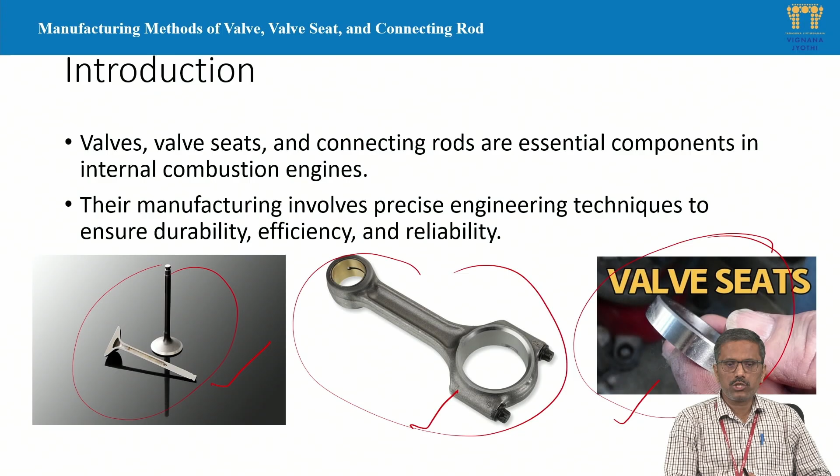Last session we discussed some components of engine manufacturing methods, and we continue that topic. Today we are going to discuss some more components of automobile engine manufacturing methods. Title of today's class is Manufacturing Methods of Valve, Valve Seat and Connecting Rod. So you can see here, this is valves, this is connecting rod, and this is valve seat. Today we are going to discuss how we manufacture these components using conventional manufacturing methods. Valve seats and connecting rods are essential components in internal combustion engines, that is IC engines, and their manufacturing involves very precise engineering techniques to ensure durability, efficiency, and reliability.

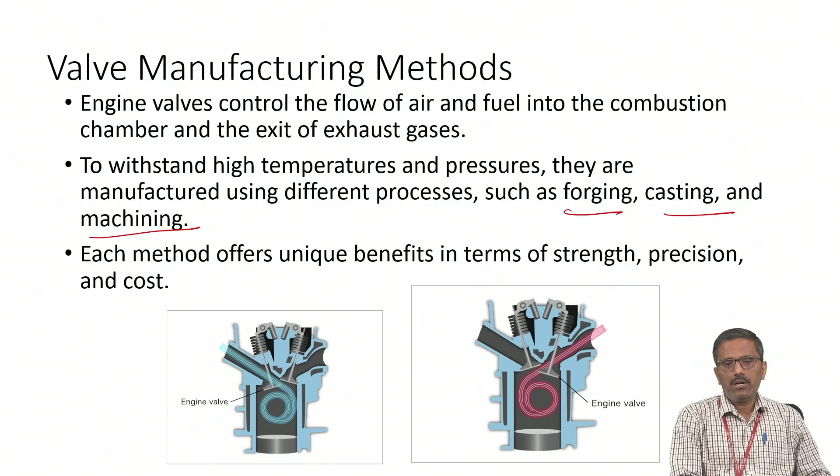Let us start with valve manufacturing methods. These valves we use in engine to control the flow of air, that is inlet and fuel, into the combustion chamber, and exit of exhaust gases through exhaust valve, to withstand high temperatures and pressures. They are manufactured using different methods such as forging, casting, and machining. Each method offers unique benefits in terms of strength, precision, and cost.

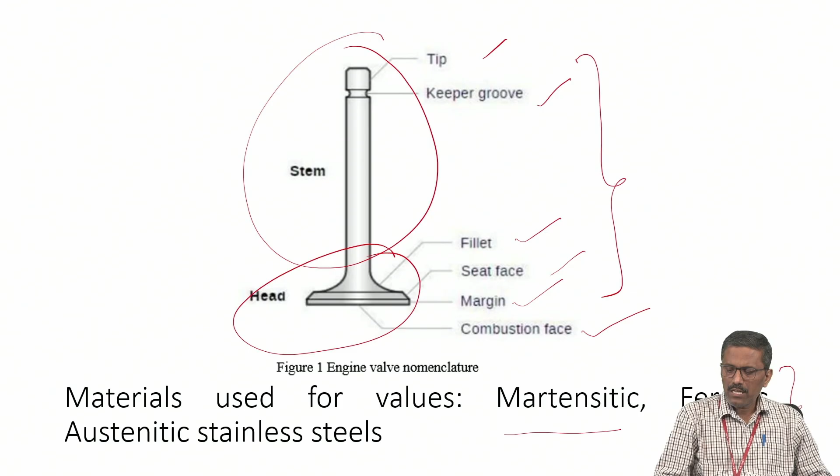This is the structure of engine valve. It consists of basically two parts: one is head, another one is stem. There are minor elements of this engine valve: tip, keeper groove, fillet, seat face, margin, combustion face. The materials mostly we use to manufacture engine valves are Martensitic stainless steel, ferritic stainless steel, and austenitic stainless steel.

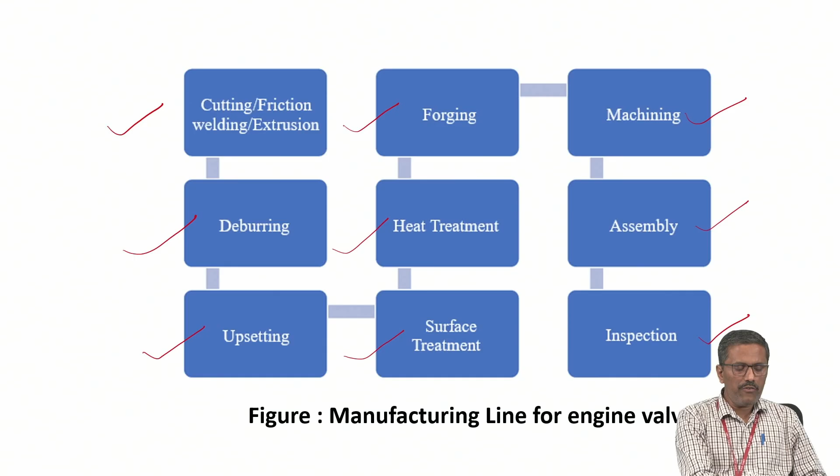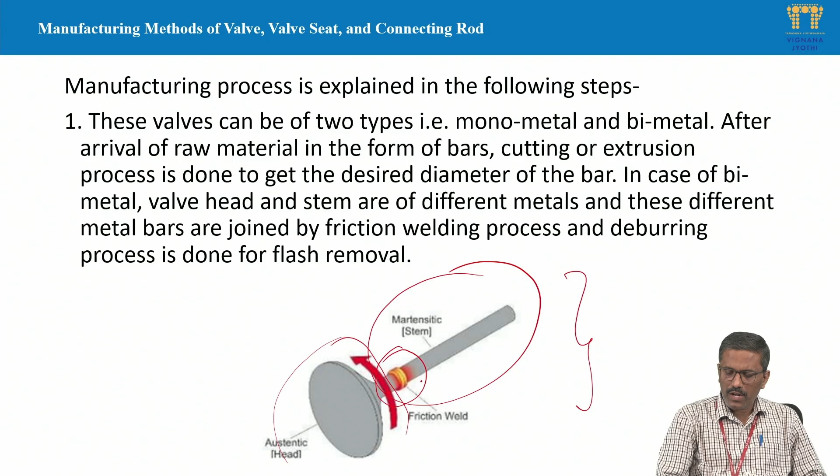As we discussed earlier, there are different methods, and here is one of them, called friction welding. Here there are two components of the engine valve: one is the stem, another is the head. These two are combined or joined together using friction welding. This is one of the methods of manufacturing the engine valve. Here you can see the joint that is welded using friction welding.

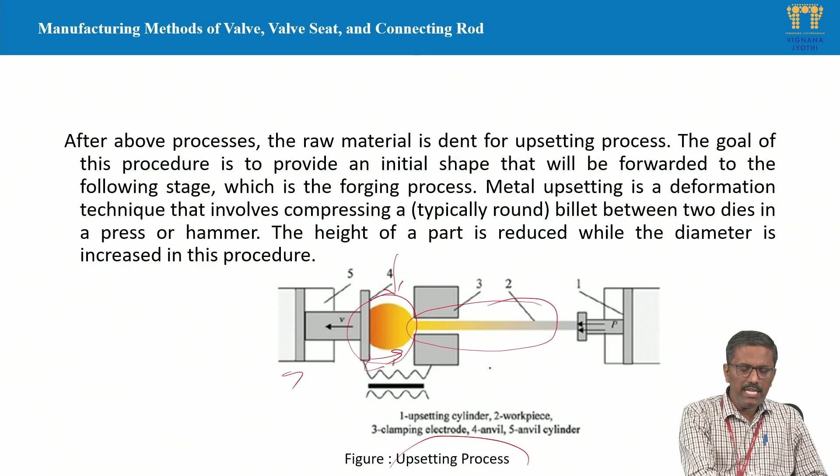Another method is the upsetting process, which comes under forging. In the forging or upsetting process, the valve head is forged using the upsetting process. In upsetting, the diameter is increased and the length is decreased, whereas the stem dimensions are not changed; only the head portion dimensions are changed using the upsetting process. After upsetting, we use CNC turning to get the groove at the appropriate position.

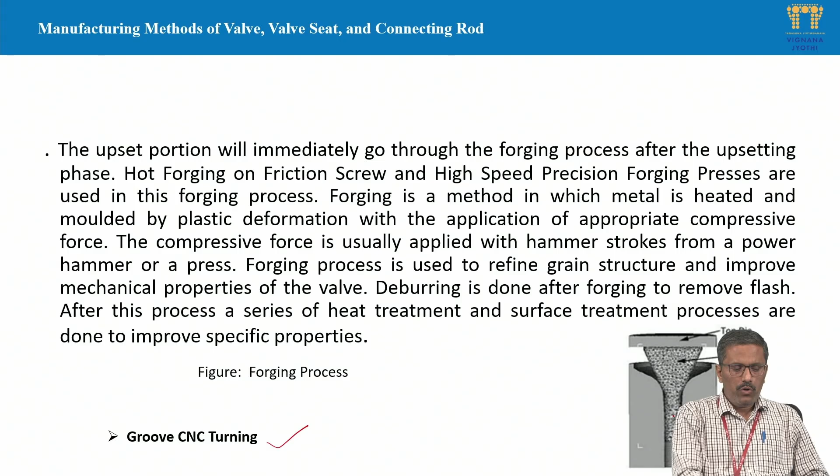In shot blasting, a surface treatment technique, high velocity steel abrasives are hit onto the surface of the valve so that it cleans the surface as well as undergoes treatment. This is also called a secondary finishing process, which produces good results in terms of surface strength.

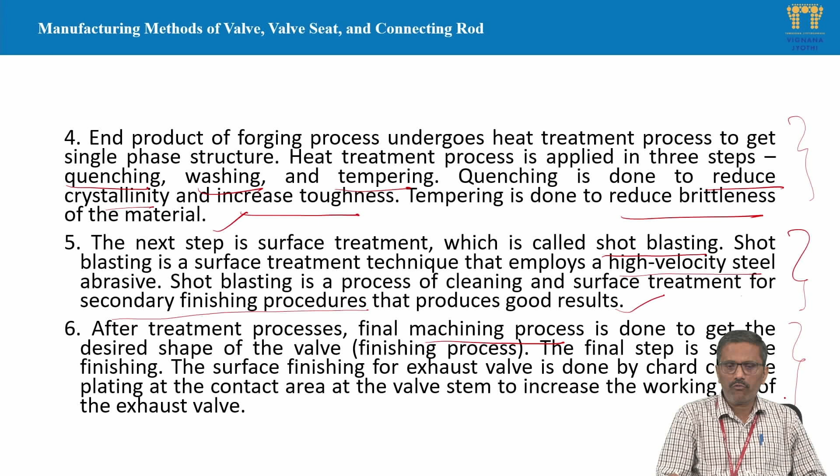After these two processes, we go for the final machining process to get exact and required dimensions using machining, mostly turning process. So that's what you can see here: different stages of manufacturing the valve using the forging process.

Initially we take a cylindrical rod, and then using upsetting, that is a forging process, we manufacture the head portion of the valve.

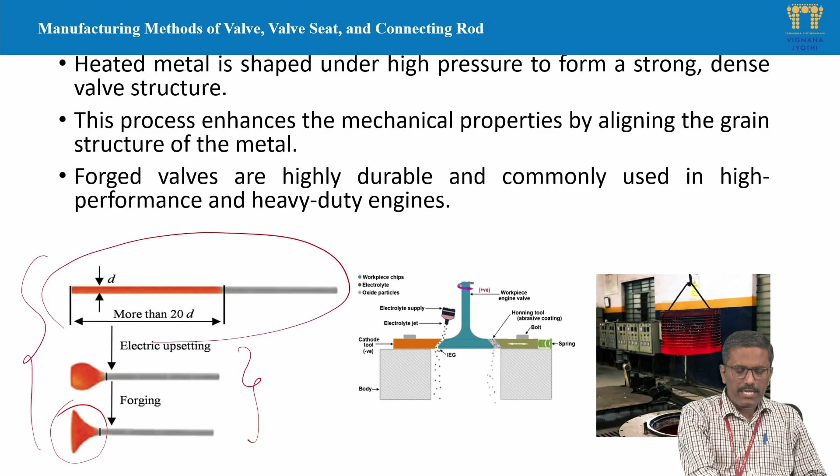Then we go for machining and finishing so that we get exact dimensions. Precision machining is performed to achieve the exact dimensions and smoothness of the surface, which includes grinding, lapping, and polishing to enhance wear resistance.

After that, to improve further properties and the lifespan of the valve, we go for chrome and nitride coating to reduce friction as well as increase the lifespan of the valve.

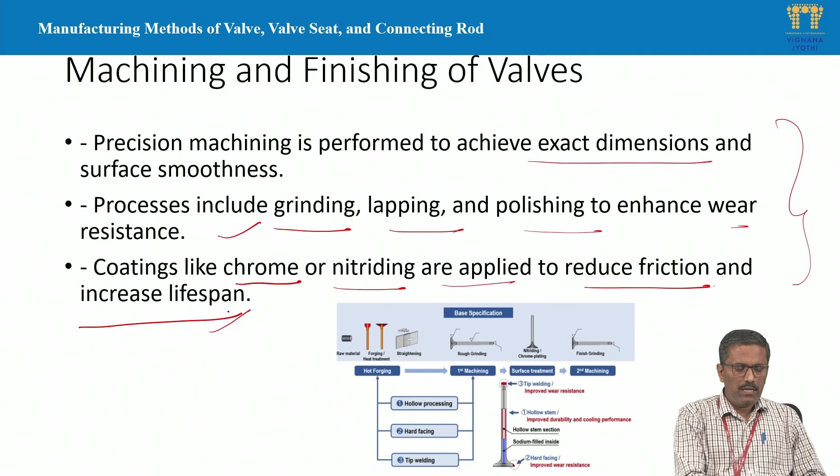Not only surface treatments, we also go for induction hardening to improve the hardness.

There are two methods of surface treatment mostly we use. One is the hard chrome method, where chromium is deposited on the surface, with thickness from 2 to 250 microns. That is the first method to improve surface hardness.

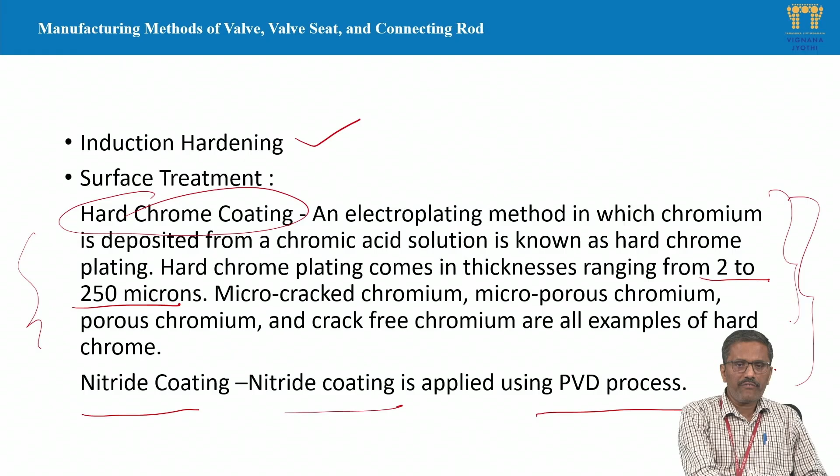We can also go for nitride coating, where we use nitride coating with physical vapor deposition. These two methods we use for improving the surface characteristics or properties of the engine valve using surface heat treatment.

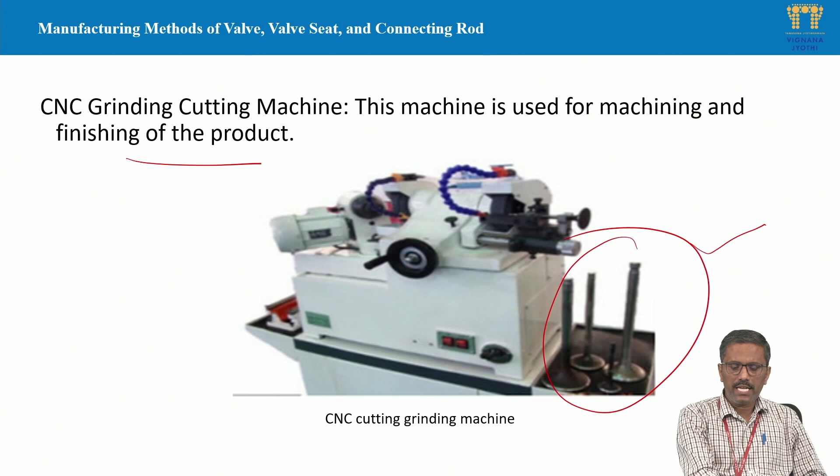This is a CNC grinding machine used to improve the dimensional accuracy of the valve. So that's what you can see here: these are the valves after manufacturing using the CNC surface grinding process.

The next component is the valve seat. So this is a valve seat, and here also you can see a valve seat. The valve seat ensures a tight seal between the valve and the cylinder head so that unnecessary leakage of gases may be avoided, whether through the inlet valve or exhaust valve.

To avoid that, a seat is required, and that seat is inserted into the engine valve entry place. The common methods for manufacturing the valve seat are powder metallurgy, which we discussed in the last session, casting, and CNC machining.

In the powder metallurgy process, we take the powder and blend it by adding a binder. Then we go for the compacting process to get the required shape, and then sintering, so that we get the required shape and size. These are the sequence in powder metallurgy.

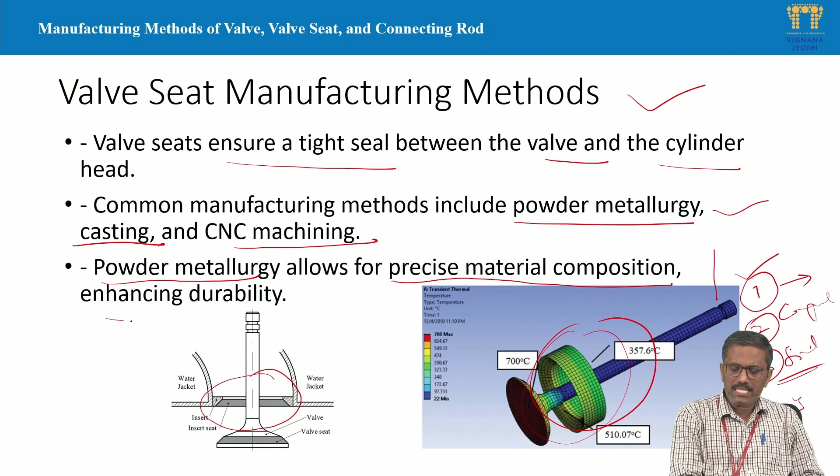The first step is powder mixing, that is blending, then we go for the compacting process, and then the sintering process, so that we get the required shape, size, and dimensional accuracy. This produces a precise material composition and enhances the durability of the valve seat.

The next mostly used method is investment casting. Here productivity is also improved, and in investment casting we get good surface finish.

To get good surface finish, we use grinding, boring, and turning processes. Turning is for external surface finishing, boring is for internal surface machining, and grinding is for overall surface improvement. After that, we go for surface treatment.

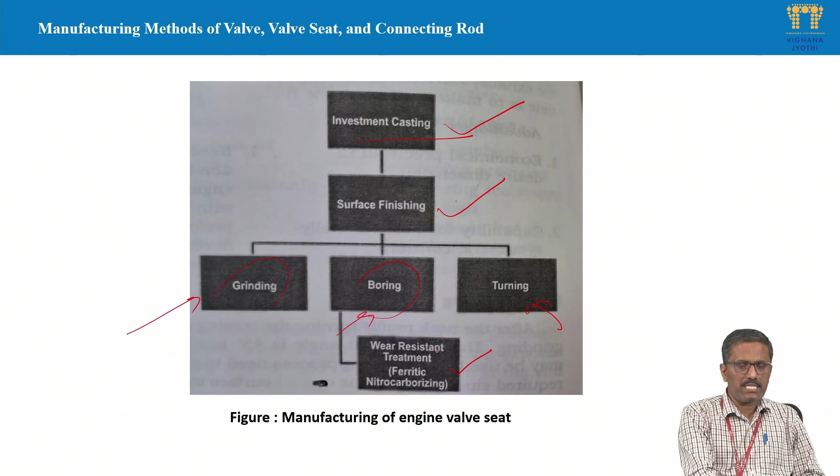Mostly we use the ferritic nitrocarburizing process, which increases wear resistance. The next method, after the mostly used powder metallurgy process, is the investment casting process.

This is a general casting process. In investment casting, first we make wax patterns using wax material, and these wax patterns are attached to a central sprue with a gating system. Then the pattern clusters are dipped into ceramic slurry several times until we gain the required shell thickness.

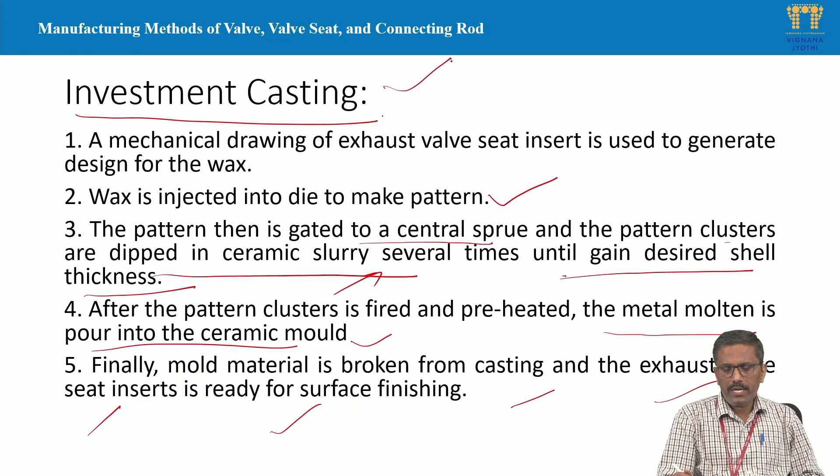After that, the pattern cluster is fired so that the molten metal is poured into the ceramic mold after the wax is evaporated. Finally, the mold is broken from the casting so that the exhaust valve seat can be obtained. After obtaining the valve seat from the investment casting process, we go for surface finishing methods.

Valve seats are the surfaces against which each engine valve closes, ensuring proper sealing in the combustion chamber. The primary function is to facilitate efficient heat dissipation and maintain compression within the engine. That's the purpose we use valve seats for.

The materials used for valve seats are cast iron, alloy steel, copper and beryllium, and powder metal inserts. So these are the different manufacturing methods for valve seat.

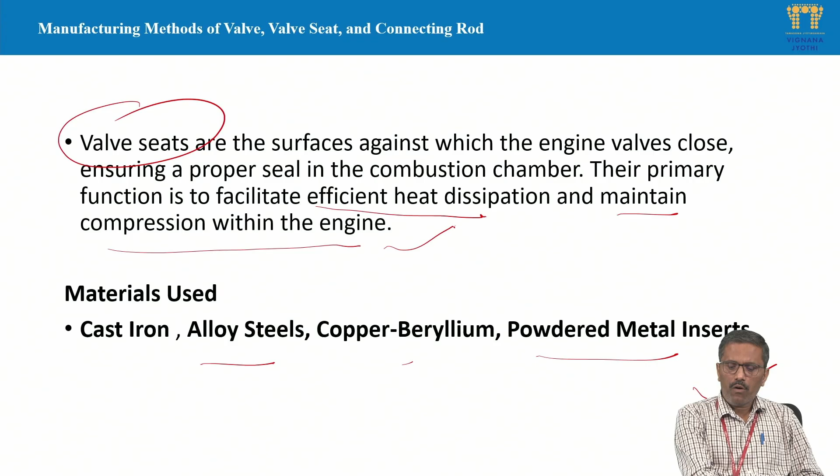The last component for today's session is the connecting rod. This is a connecting rod - a very important component that links the piston to the crankshaft. It must withstand the extreme forces which are developed from the forces obtained on the piston.

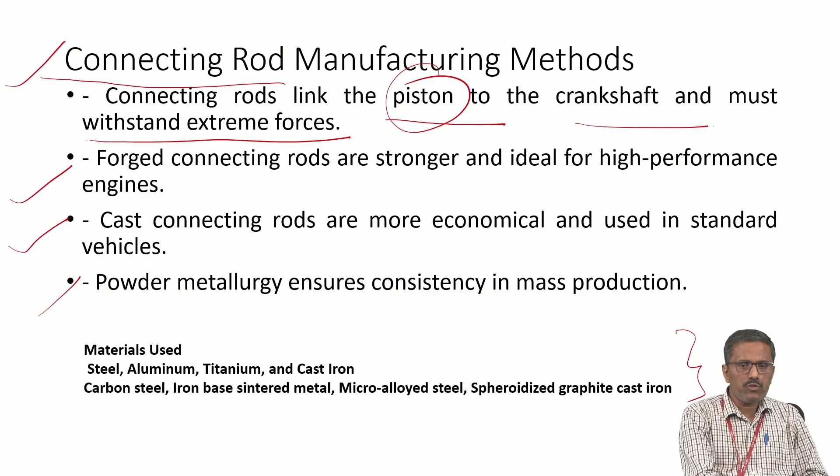Connecting rods are mostly manufactured with a forging process, and sometimes we also use casting process, and very rarely powder metallurgy process. The materials used for manufacturing connecting rods are steel, aluminum, titanium, cast iron. Sometimes we also use carbon steel, iron based sintered material, microalloy steels, and spheroidal graphite cast iron. These are the materials used for manufacturing connecting rods.

One method to manufacture the connecting rod is the casting process. Here you can see this is a die - mostly we use the die casting process. In a die cavity the shape of the casting connecting rod is prepared, and then we pour the molten metal into the die, and after solidification we take it out, finally getting the connecting rod using die casting process.

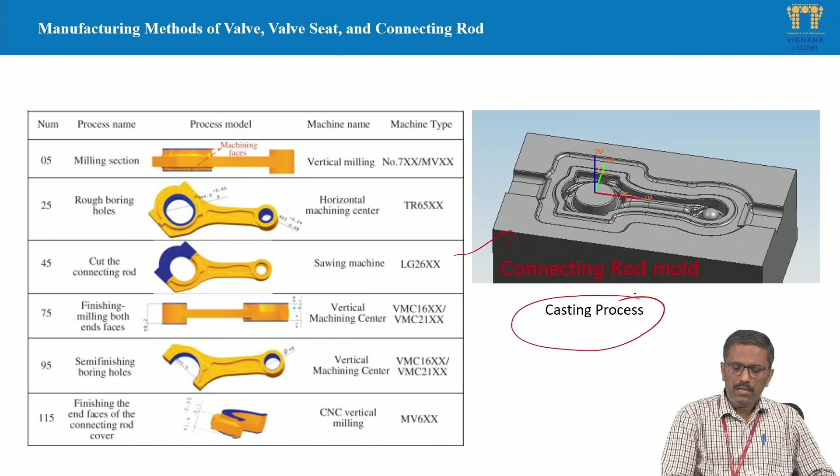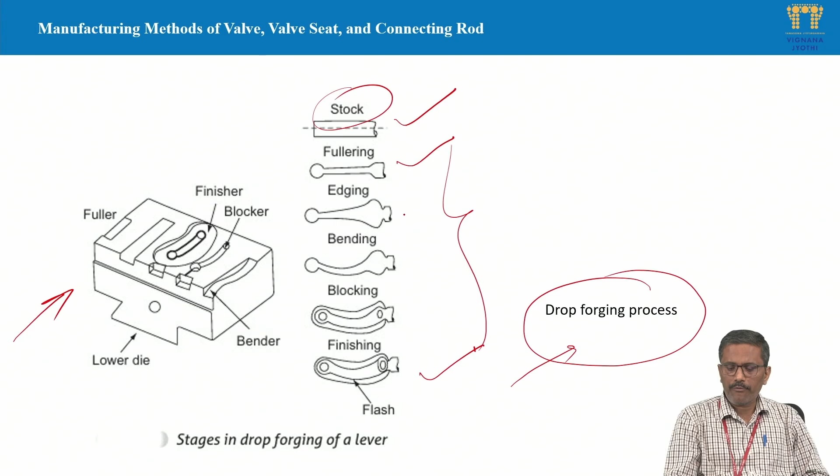In the first step, we take raw material in the form of a stock, and then we go for the first step of forging, which we call fullering, and the second step called edging - fullering to edging. This gives a rough shape of the connecting rod, and then we bend it to required dimensions, and then go for blocking to get the near final shape, and then finishing, where we get the final shape after removing excess material in the form of flash.

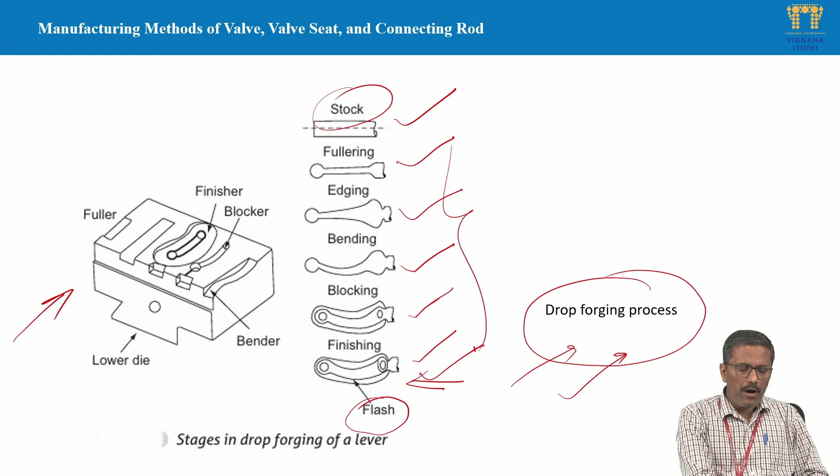So this is the drop forging method, the most commonly used method of manufacturing the connecting rod.

After manufacturing the connecting rod with casting and forging processes, we undergo machining process to get final dimensions. Precision machining is critical for tight tolerances and proper fitment between the piston and the crankshaft.

Heat treatment is necessary to improve strength - mostly we use carburizing and nitriding processes. After heat treatment we go for surface treatment like shot peening to improve the fatigue resistance and lifespan of the connecting rod, improving both surface characteristics and dimensional characteristics.

That's all for today's session, and we'll stop here. In the next class, we'll see how to manufacture the crankshaft and camshaft. So that's all for today. Thank you.